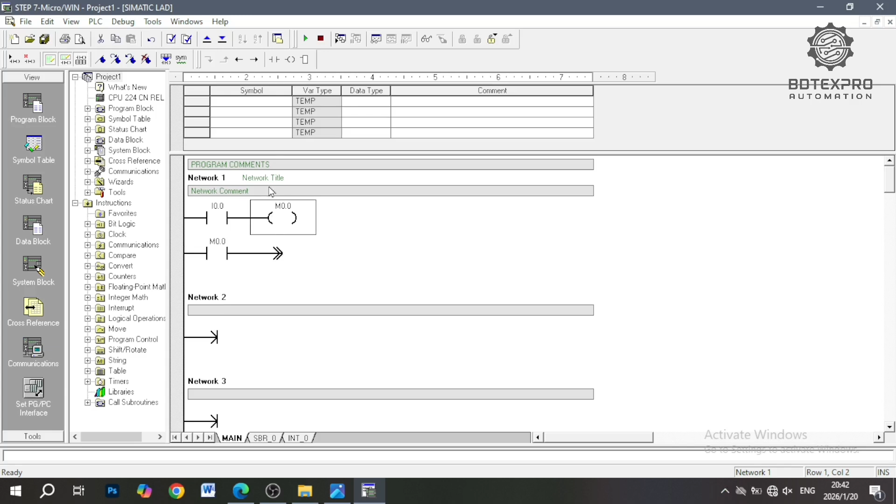Right below that, in the same network, let's drop in a normally open contact. The address will be M0.0. To create our latch, we will draw our line to connect and seal the circuit.

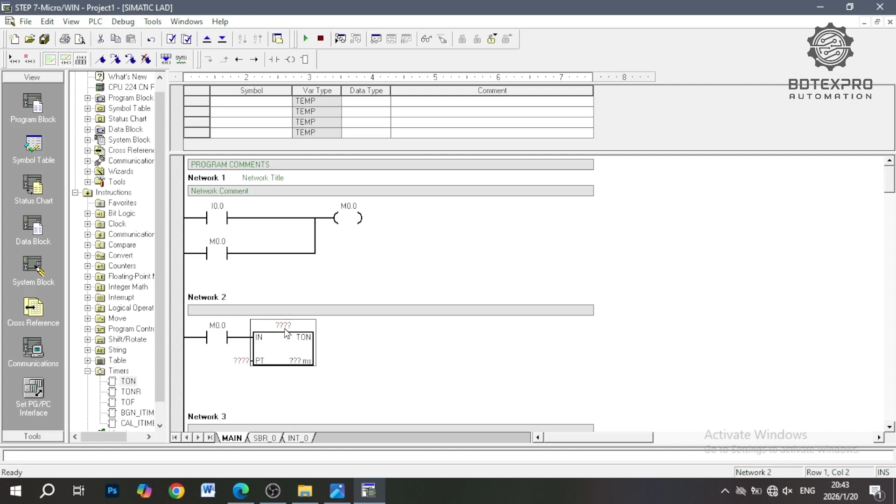Now moving on to network 2, we'll take the same internal bit M0.0 as a normally open contact. To add the timer, let's look at the dialog box on the left, find the TON instruction, double click it, and it drops right into the network just like in our previous video. We'll address this as T37 and set the preset value to 50.

In network 3, we'll add a normally open contact for T37 and connect it to our motor output Q0.0. Since we have already added the latch in network 1, we now need a way to unlatch it. So we add a normally closed contact, that is I0.1.

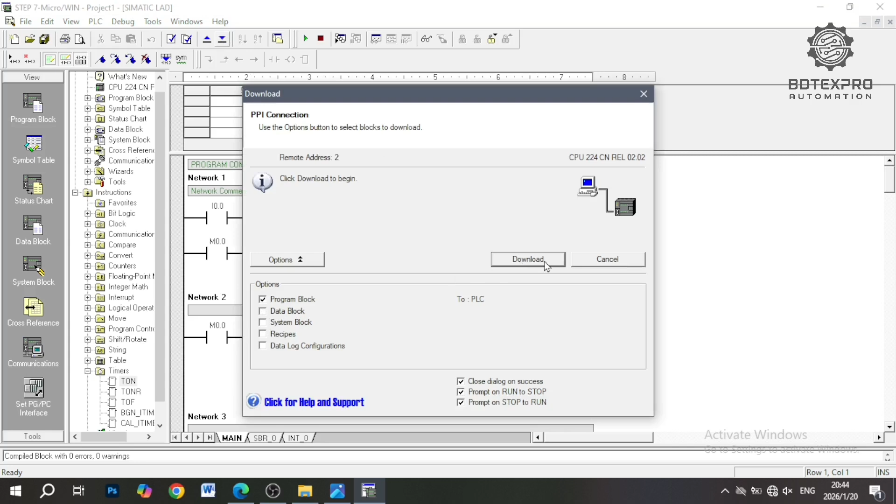So our program is now completed. Let's compile it and check for any errors. Notice there is no error. So let's download the program into the PLC. Go to download.

PLC in run mode, and go to online. PLC now in online mode. Over on the physical PLC, remember that we'll need to wire up a stop button to input I0.1 to handle that unlatched signal.

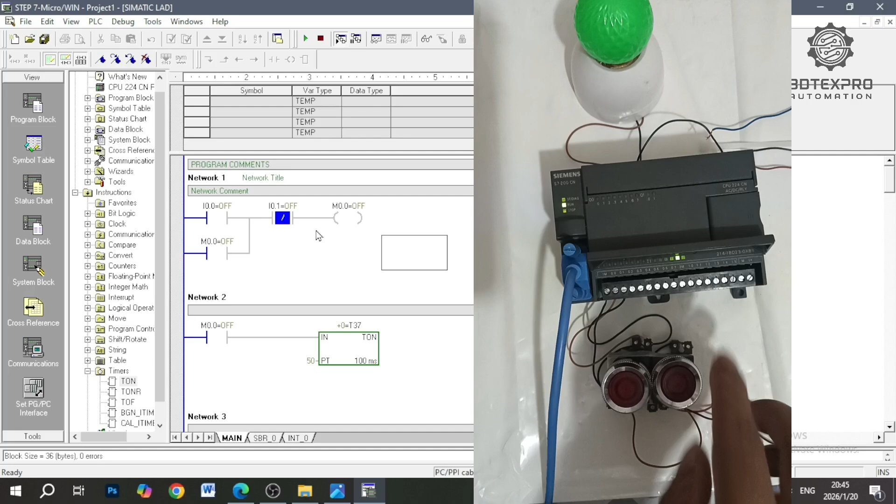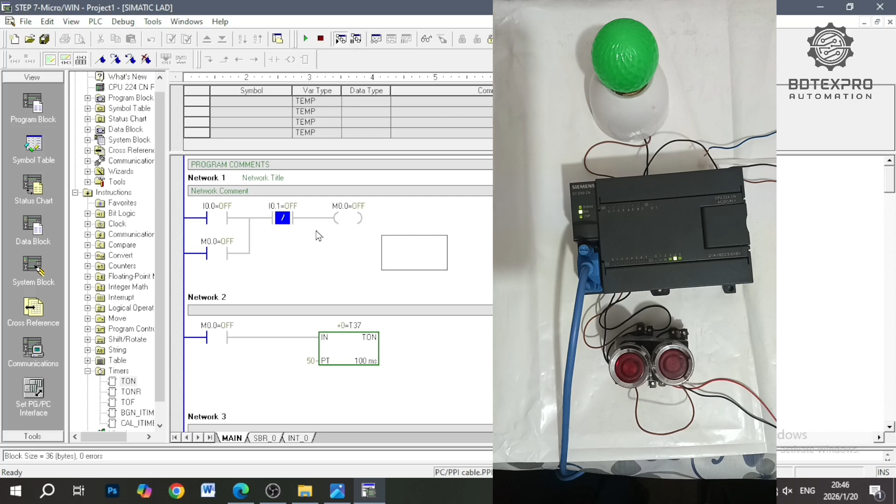Let's click I0.0. After 5 seconds, the light is on, meaning motor is on. If you want to stop the motor, or unlatch, click the I0.1 push button. You can check, immediately the motor is off. Again, we click I0.0 and the timer starts counting. After 5 seconds, Q0.0 is 1. So this is our pretty simple project.

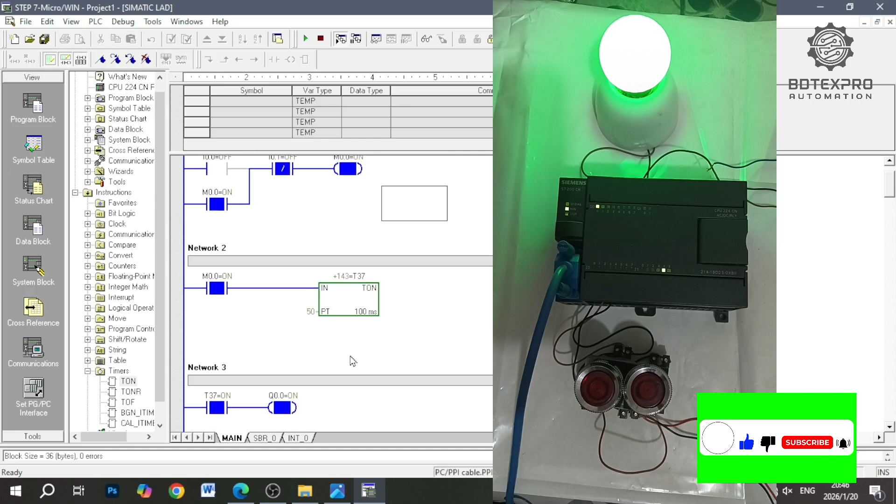So let's now explain how to use the TOF timer with an exercise. For the TOF timer, now go to offline mode program and let's delete the TON timer. Go to the dialog box, check here for TOF, double click it, and it takes its place in the network. The address will be T37 and preset value 50.

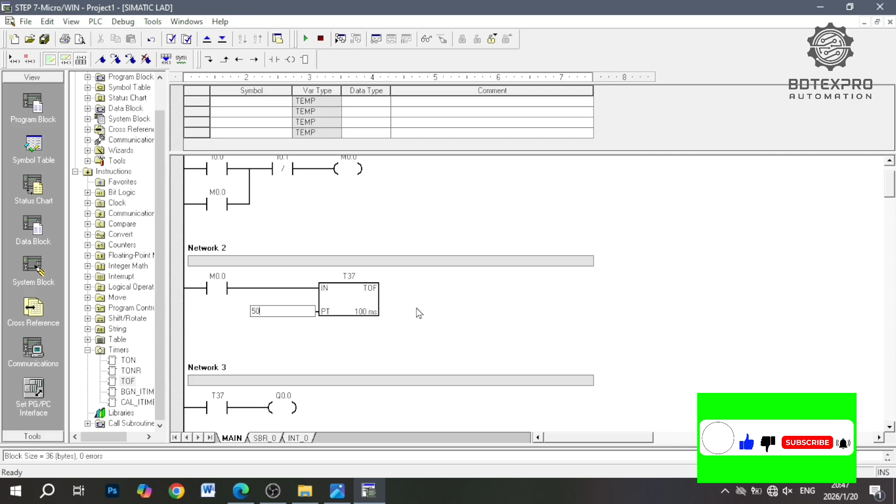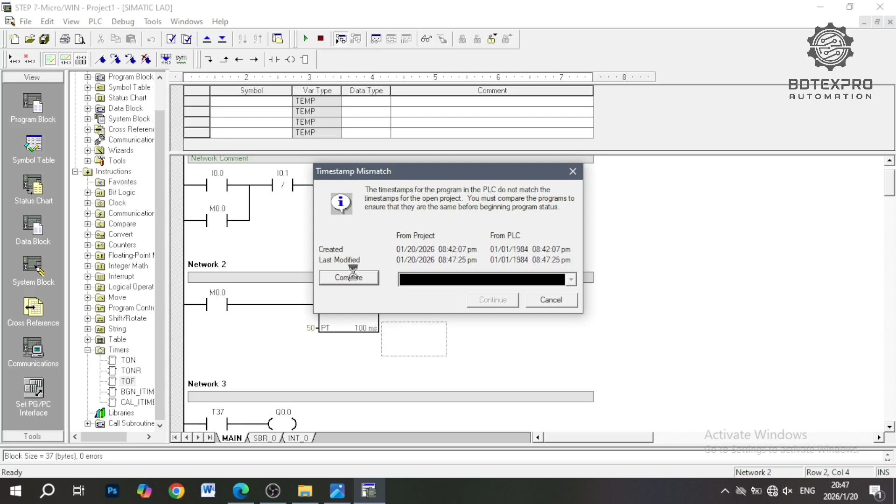Now let's download the program into the PLC. Go to download. Run mode, download completed. Now go to online. Compare and continue. Okay, now the program is in online mode.

So when we press I0.0, the M0.0 internal bit will be energized. At the same time, Q0.0 will go on, and when we press I0.1, the timer starts counting automatically. After 5 seconds, Q0.0 will be off.

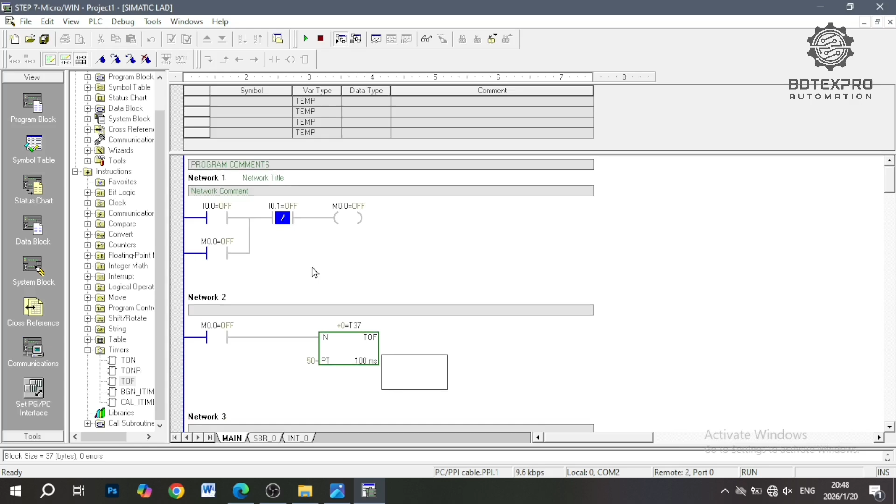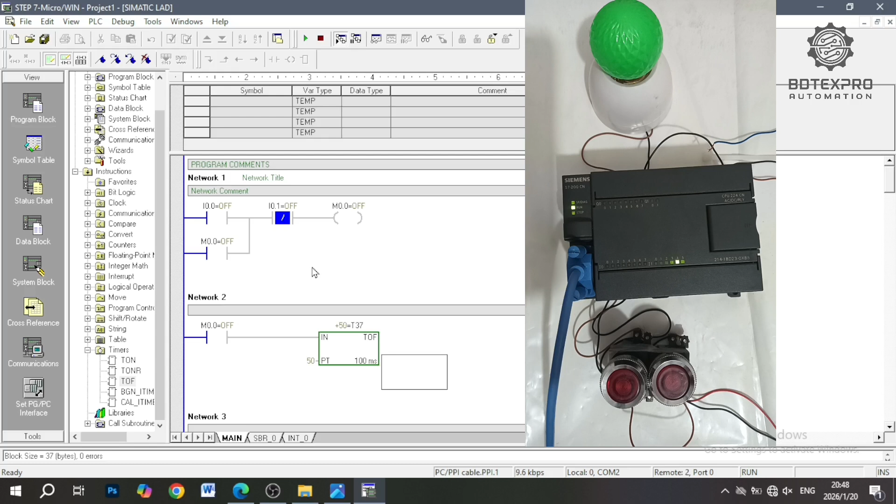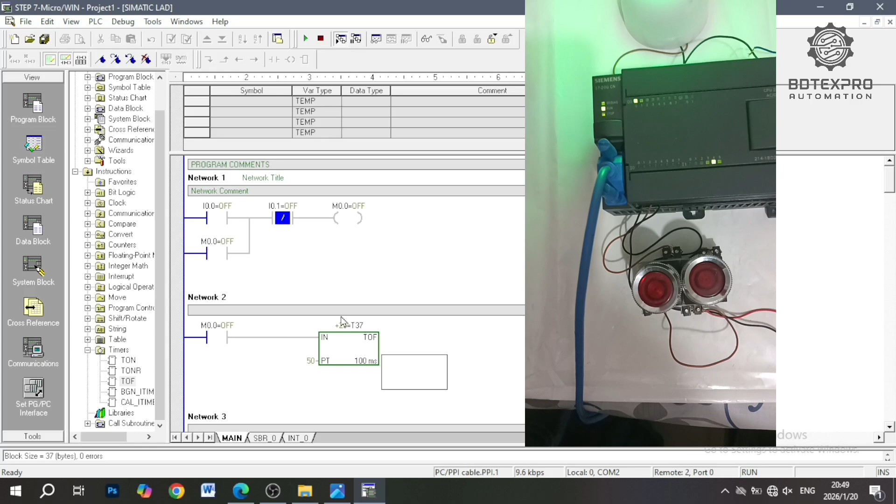So let's check it on the PLC. When I press I0.0, the motor turns on. When I press I0.1 push button, after 5 seconds, the motor will be off. Again, we press the start push button, motor on. When I press I0.1, after 5 seconds, we check - the timer starts counting and the motor will be off.

Next video we will dive deeper into on-delay timer logic with more hands-on examples.